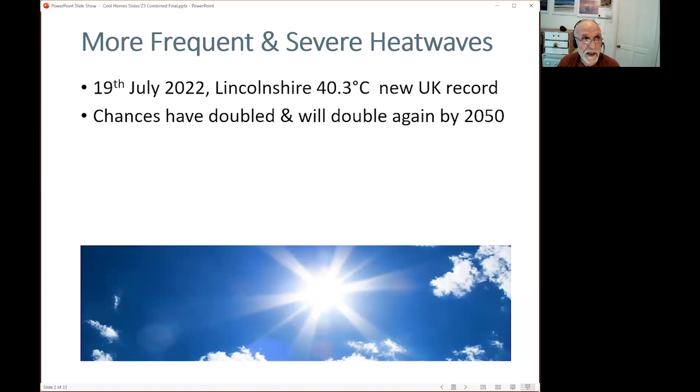Temperatures are going to carry on rising. And in fact, with El Nino, we expect that the next few summers will be even hotter than you might expect from global warming. I read recently that the chances of severe heat waves have doubled due to our carbon emissions, and it's expected they will at least double again by 2050. This is a bigger problem that's coming, or even so already - the Office of National Statistics estimate that there were 3,000 odd heatwave deaths in England and Wales in last year's heat waves.

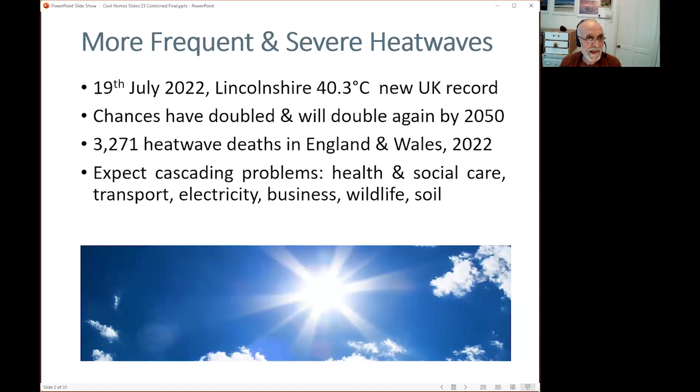So this is a serious problem for some people, and for many really uncomfortable. We have to expect - I'm giving you the full problem - but we expect there will be cascading problems in the severe heat waves to come. Health and social care services will struggle, so will transport, roads will be melting and railway tracks will be buckling. There may be quite severe disruption and, of course, effects on business and wildlife, the soil, natural environment.

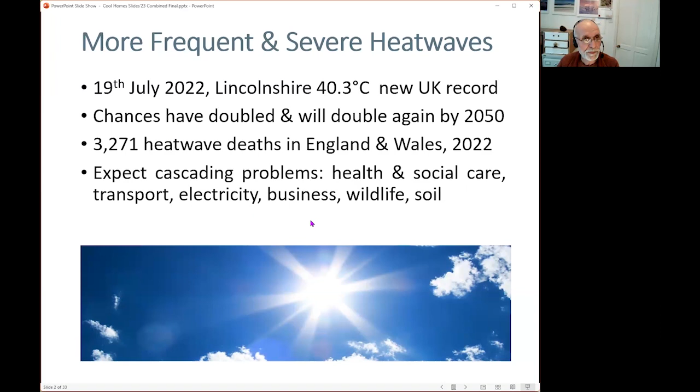Okay, so here's what we're going to do about it.

Hello, and nice to see everyone, and to be thinking about summertime finally. I have noticed that the sun, when it does get through this year, it is very hot indeed. Things have changed quite a lot in the last 3 years that we've given this talk.

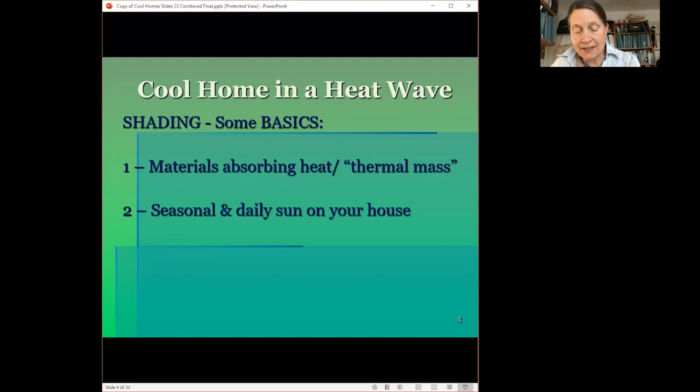We really have to be prepared, as Tom says, for 40-degree heat and over. So I'm going to look at two things, thermal mass and shading. I need to establish a couple of basics - these will help us when we're looking at different cooling strategies. We're looking at how materials absorb heat and what their thermal mass is, and also the seasons and the daily sun on your house.

Dense building materials - that's concrete, brick, and stone - absorb more heat and solar radiation, and then they release it slowly. This is what we call large thermal mass. In contrast, say metals, for example, conduct and release the heat really quickly. And of course, a substance like ice absorbs the heat and melts, but dense materials absorb and hold the heat.

Insulation foam and timber generally absorb less heat - they have smaller thermal mass. Glass, and that's even double and triple glazing, can absorb and transmit heat. It can allow heat inside in the summer, and it can leak heat outside in the winter.

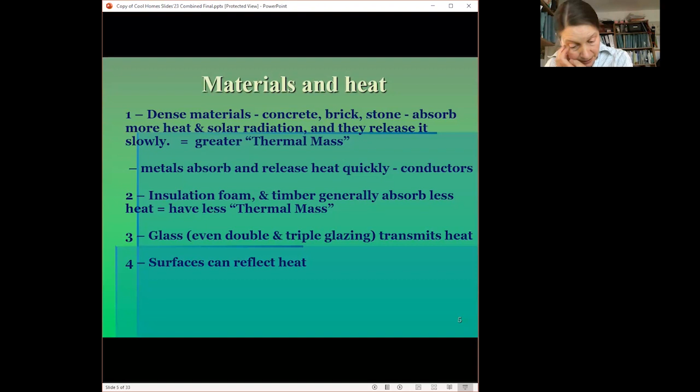And surfaces can reflect heat - Tom will talk about that a bit more later. But examples would be a light roofing material reflects more heat from coming into the building. And you can have solar film on glass to reflect the heat out or in.

So let's apply this to a house in the summer. Let's assume your house, or maybe a room in your house, is cool on the morning of a heat wave. How does that heat get into your house? Windows are a likely route in, but how? If the window is closed, the sun still shines through it, whether it's single, double, or triple.

When direct sunlight gets through the glazing, it will shine on and be absorbed by any surface it reaches. You can see that on the left - there are spots of sunlight on the chair, on the floor, on the table. These surfaces will radiate that heat back into the interior of your house long after the sun has moved around and the window is in the shade. And the window itself and its frame will also transmit heat back into the room.

So I've made myself some rules of staying cool. Rule number one is, in a heat wave, you want to block this direct sun - you don't want it to shine in the house and heat surfaces. So on the left photo, on the right-hand photo, the Venetian blinds are actually blocking those spots of sunlight from getting on the floor, on the table, on the chair.

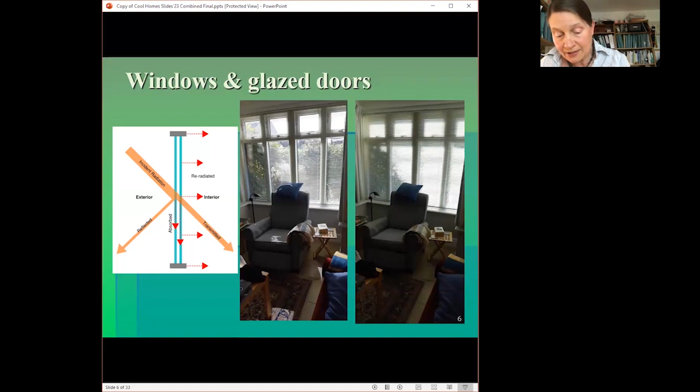Clearly, if you want to keep out direct sunlight during a heat wave, you need to get used to a shading routine morning and evening. If you also know the outdoor temperature, or at least whether it's cooler outside the window than in, then you can judge whether to open the window or not. We do not want to be accidentally sucking hotter air into the house in a heat wave. I'll speak later about ways of cooling the air outside your windows.

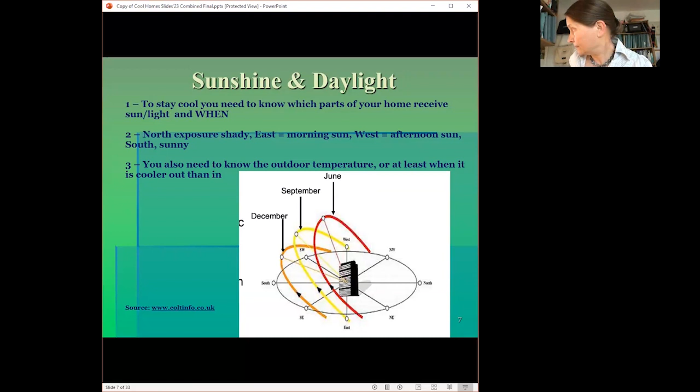The simplest way to shade is to put something like a roller blind or other fabric over the window. But these don't follow my rules. I want to be able to see the view out and to get some daylight in, but still keep the heat out. So an alternative is these Venetian blinds. As we've seen, they can be angled to allow a view out to some extent.

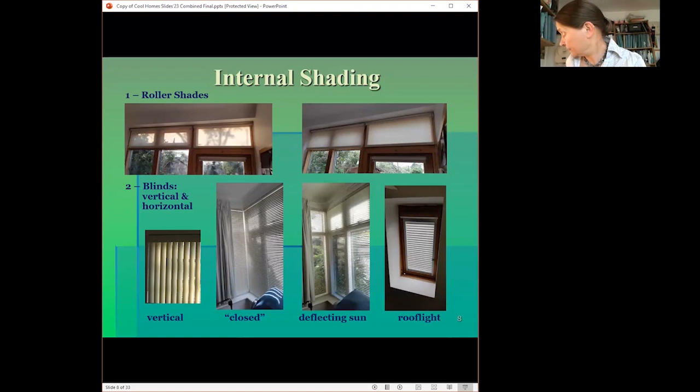Blinds have a fair number of moving parts to keep aligned and to keep clean. And the blind blades themselves heat up in the sunshine, so they will actually transmit heat into the room.

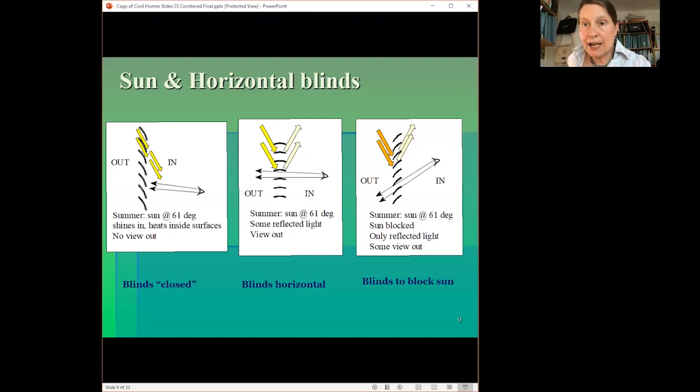So let's look now at another kind of shading: external shading. The great advantage here is that the sun is blocked before it can heat up anything inside or the windows themselves. With internal blinds, as I said, the window heats up and the blinds themselves get hot, and both of these will warm the room. External blinds avoid this.

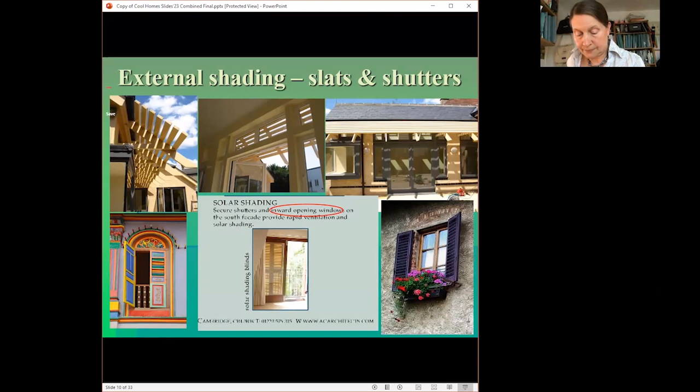Direct sun can also be screened by suspending fabric outside the window. Heat blocking mesh has been readily available for roof windows for some years. If you have old roof windows, you can add these, and there are people locally who will do that. If you're interested, put a note in the chat.

Maintenance under the wear of wind loading, rain, and grime presents significantly greater problems with external blinds compared to internal ones. These particular fabric awnings are stored in a metal cassette at the top of the roof window, rolled up. They are extended into place at the beginning of the hot summer weather, and then you leave them there until the autumn. This way, they stay cleaner all winter and are subject to less wear and tear. As part of the roof light package, they're quite reasonably priced.

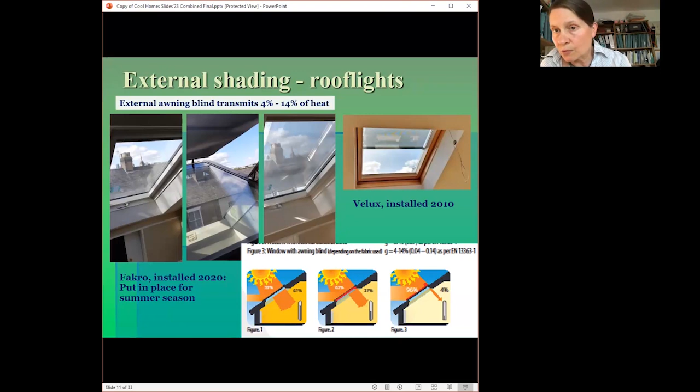It has so far not proved easy to obtain awnings for windows in this heat blocking material in this country, even though they're readily available for roof lights. Some of my clients will be making rectangles of this micromesh fabric, bought as a roll of fabric. With eyelets, they will be hooking these to the outside of their window frames in the summertime. But so far, to my knowledge, such simple awnings are not available commercially, at least not at affordable prices. In fact, for that project, we had a quote of £1,800 per window.

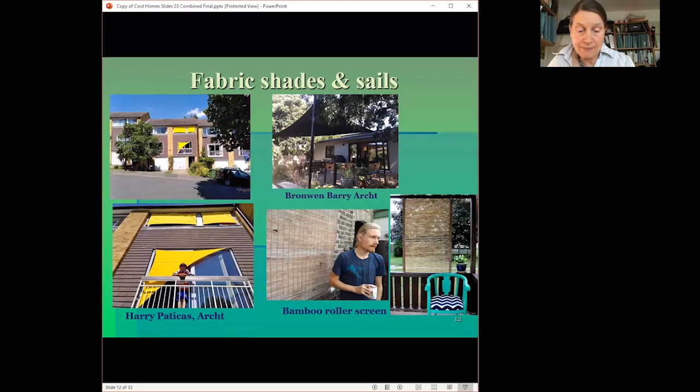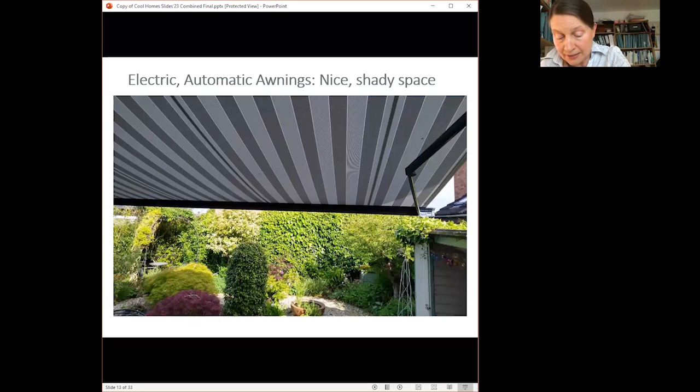Now we come to the video. Do we want to show this, Tom? I think we're short of time, Margaret. Okay, we'll skip it then. And then we can come back to it if people want. Sure, it's a lovely video if you can see it sometime. Oh, there she is, wait a minute.

So in summary, you need to know where and when the sun comes into your house. In a heat wave, you can make a big difference if you evolve a daily routine for blocking direct sun. Tom will talk about ventilation, but opening and closing the windows is also part of that routine. Many forms of internal shading are available and flexible, but they do allow in a fair amount of heat. External shading keeps the heat out more efficiently. It can be fixed or adjustable, but it has to be tough enough to cope with wind, rain, and grime, which inevitably means it will be more expensive. But of course, the total effect can be very satisfactory.

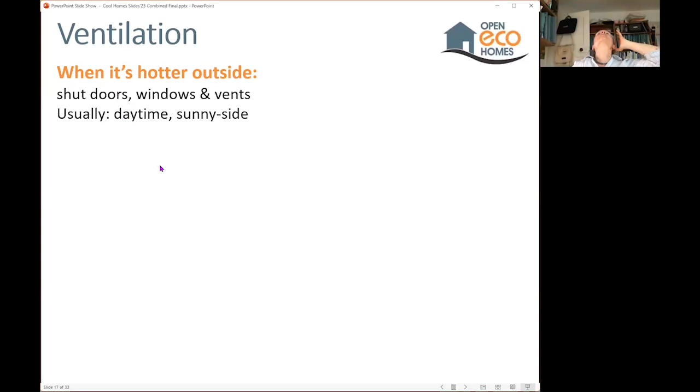So when it's cooler outside, usually at night, that's the opportunity to really get your house cooled down. If you're in a multi-story house, it's great if you can open a window or vent at the bottom of your house and at the top. Then you'll tend to get the chimney effect that will flush cold air from the bottom, and the hot air will escape at the top.

Or maybe you don't have two stories where you live, so if it's single story, maybe there's a way you can arrange to open windows on either side of your house, particularly if there's a breeze that will flush the hot air out of your house. Or maybe you need to make use of a fan as well. Fans are low consumption in terms of electric consumption, especially compared to aircon, so do use fans if you need to get effective ventilation.

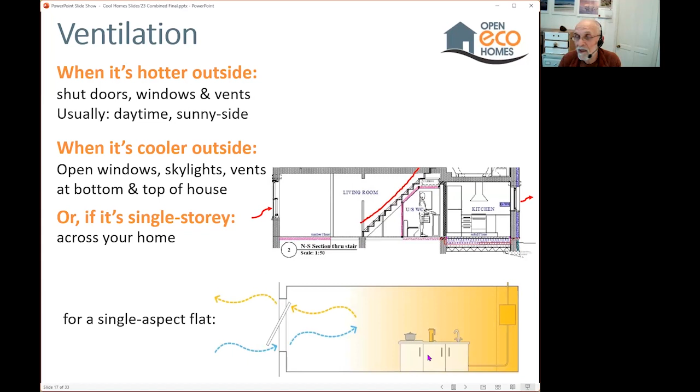My heart goes out really to people who are in single aspect flats. There's still plenty of new build flats facing south, with no shading on the windows, so you can't get a through draft through them. We went round one recently where the only way they could get a through draft would be to open the door onto the stairwell, which wasn't a secure thing to do at night. In fact, that particular house had hot water pipes due to solar thermal on this block of flats.

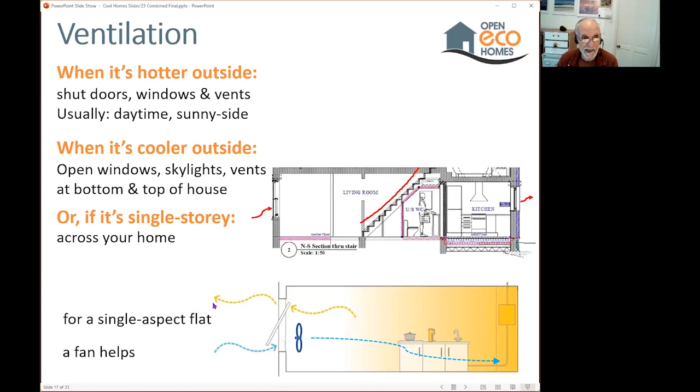Hot water pipes were heating up the back of the flat. She did get those better insulated, but it's a slight improvement. If you've got a window that will open at the top and the bottom, then you'll get some circulation like this. And if you could have a fan here, that would help blow the cool air to the back, and the warm air will get out the top. But all sympathies for people who are stuck in a very sunny, hard to ventilate flat.

So we talked about the security of being able to open windows at night. Here are some regular kinds of window openings, and most of them can have secure fittings. These will prevent the window being widely opened, so nobody can come in or out, but you are definitely letting the air in. Look for a general category called secured by design - that's a good place to look for windows and doors that are secure.

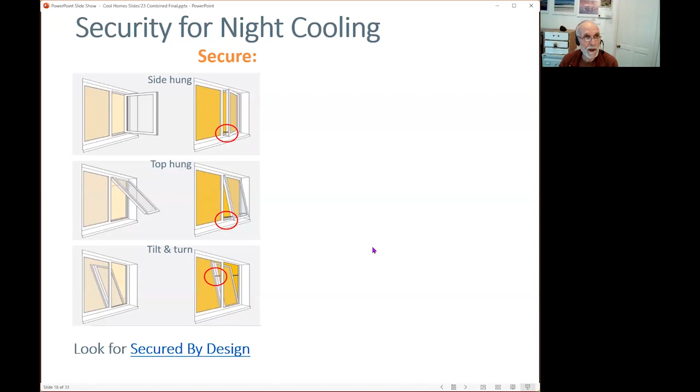And of course, you may have sash windows that slide up and down. There are systems - here's one called Ventlock, which can be used to partly open a sash window, but it prevents anyone from outside opening it further.

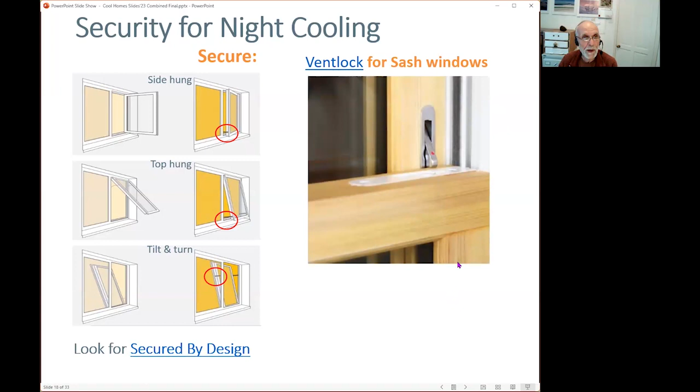Okay, now a little bit about insulation. So here is a slate roof at over 74 degrees in a heat wave. It's quite likely that you may well have a really hot roof on the surface. So plainly, you don't want that heat to get radiated down into your home.

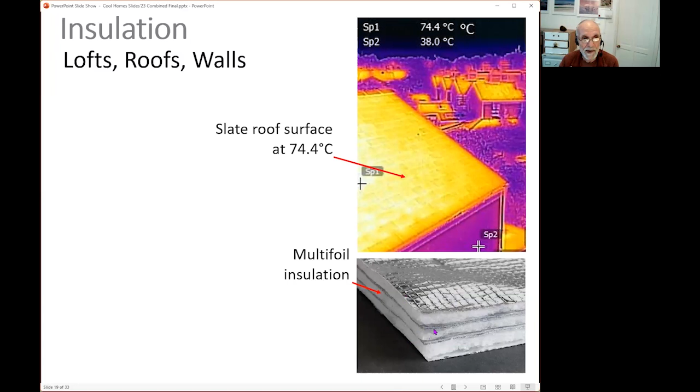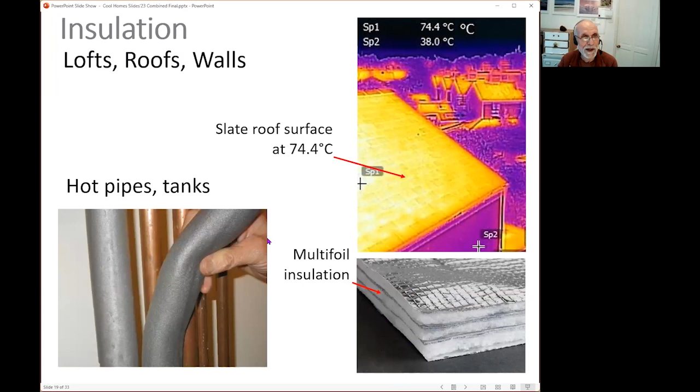If you've got good loft insulation or good insulation under the roof, that will help, because it's radiant heat coming down, not really a problem with convection. This multi-foil insulation may be particularly effective - it has 4 layers of shiny surface. And of course, insulation is important too on your hot pipes. Even in the summer, you probably want hot water, so make sure those pipes are well insulated.

And now a little bit more about thermal mass. As Margaret said, brick, stone, concrete - these heavy things can work to steady your indoor temperatures. Here's an example looking at solid wall insulation. First of all, if you've got the insulation on the outside, that's useful from this point of view, because all these tons of bricks have got lots of thermal mass on the inside of the insulation. If you've got a solid floor, that will also be thermal mass, and it may be good to have a tiled floor to let the cool underfloor keep you cool. So in general, that will have a steady temperature.

In contrast, if you've got internal insulation, then it's going to be great for quickly changing temperatures. Having a carpet may insulate your solid floor a bit, but in general, this would be quicker changing. And in the winter, that may be an advantage if you're coming home after work and want your rooms to heat up quickly - this kind of low thermal mass solution will help it warm up quickly.

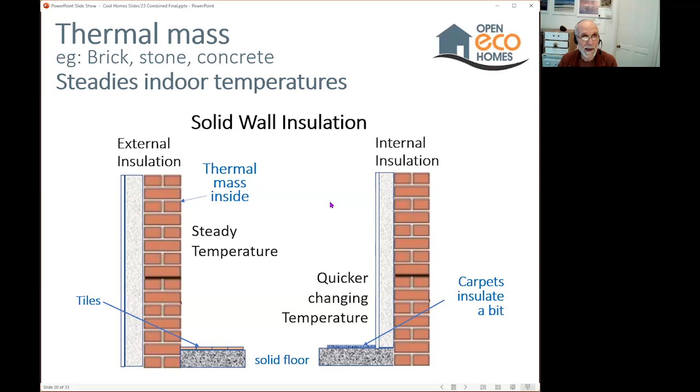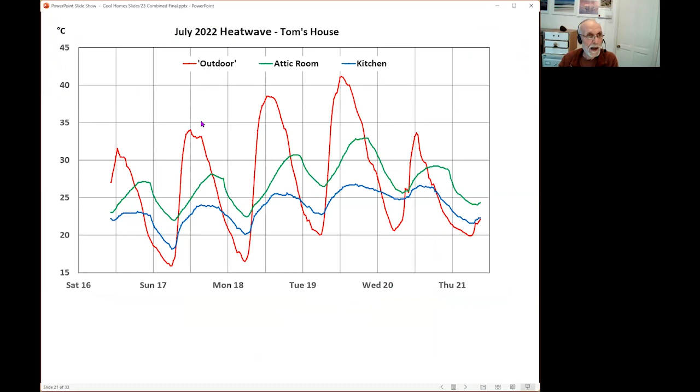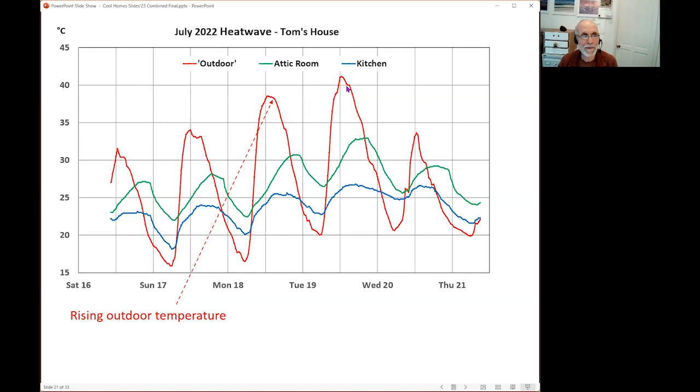So this is some temperature readings for my house in July last year in a heat wave. The red line is my measurement of the outdoor temperature. Day on day, these 3 days of this heat wave, the maximum temperatures went up every day, and also the nighttime temperatures were rising. This day, the 19th of July, was the day there was the record 40-degree temperature. My temperature sensor seemed to be saying a bit more than that, but I'm not claiming the record - I think I've got a sensor that isn't weather station quality.

But have a look - we have an attic that hasn't got a lot of thermal mass. It's got stud walls, and of course it's right under the roof, and so that was going up to 33 degrees on this worst day, quite uncomfortable. Whereas the blue line is our kitchen, which is downstairs, with good thermal mass, and without any aircon or anything, it didn't get hotter than 27 degrees, which I find really comfortable still.

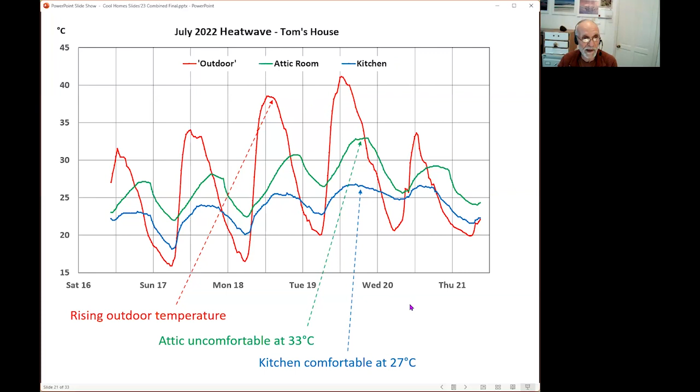So this is what you can do, but I would point out as well, the heat wave broke off after the 19th of July, and it got colder again. If this heat wave had carried on for a week, our temperatures would probably have continued to rise slowly. So the longer it goes on, it can be more of a problem.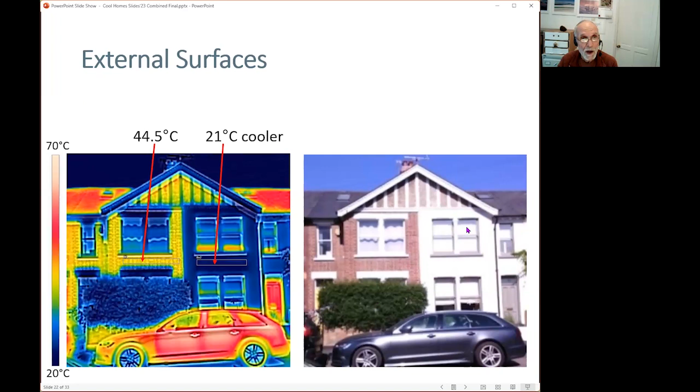You can also see here that these houses had really hot roofs, some up in the 60s. And this one on the right had quite a hot door - it's got a grey coloured door that wouldn't have been as hot if it was white. You can see they're using white blinds inside, which is a good idea.

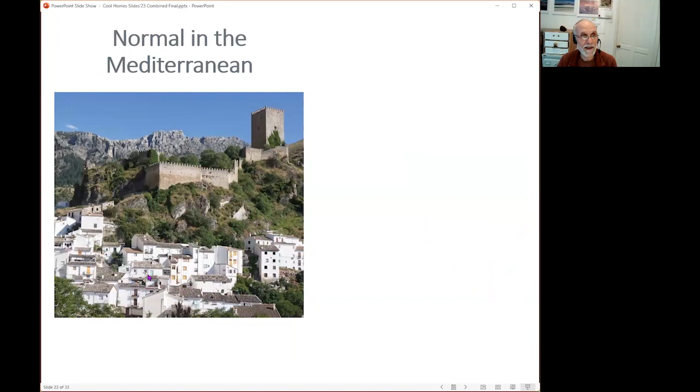And of course, in the Mediterranean, white painted buildings are completely normal - they know it keeps the sun out. This is a Cambridge house, but there aren't many like this: white painted, with external shutters.

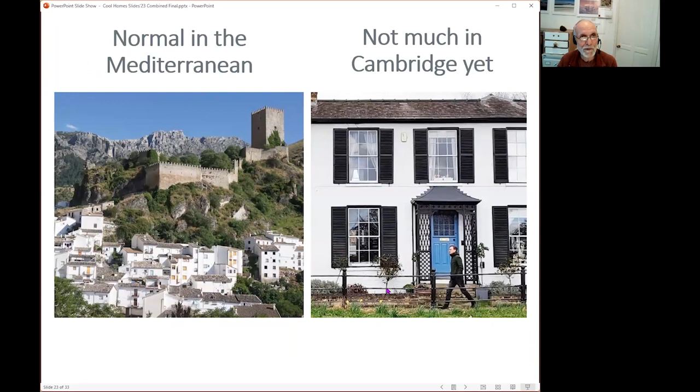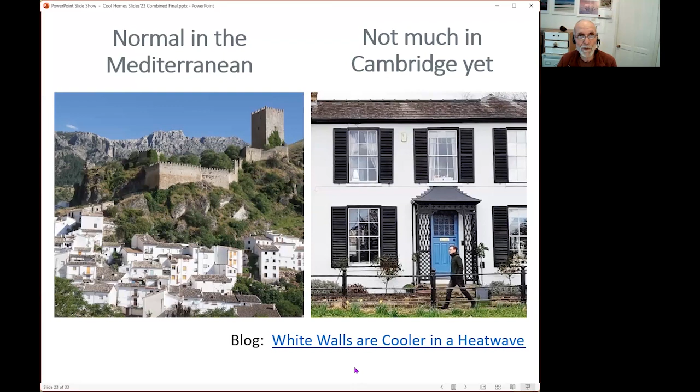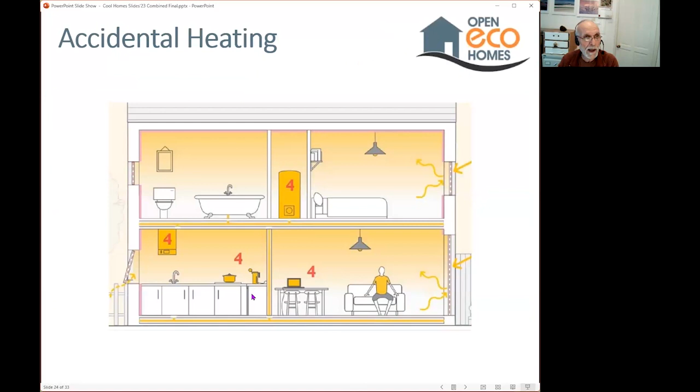So one more topic about accidental heating - these are ways you may need to think about controlling what makes your room hotter indoors. If you've got your boiler mounted indoors, that will be hotter than you want probably - maybe it can be put in a cupboard.

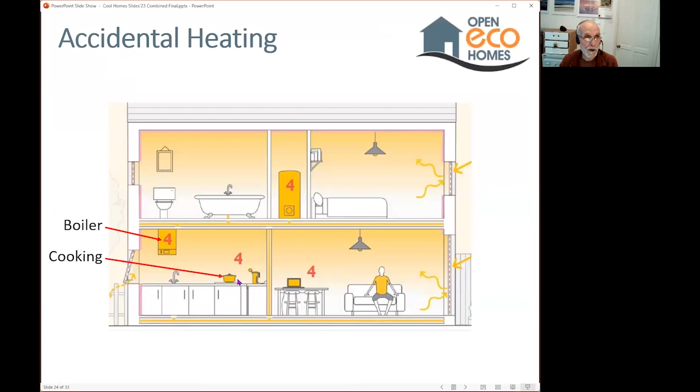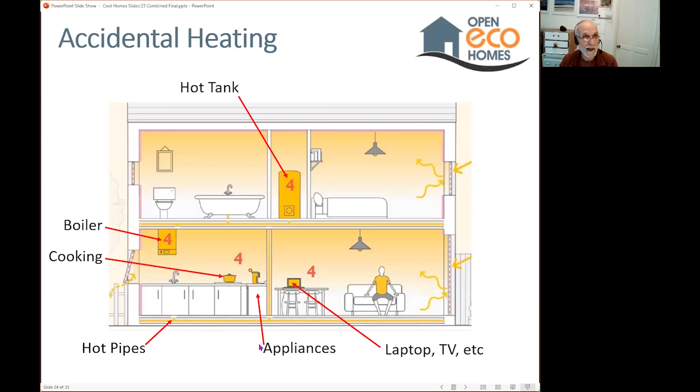Cooking itself will put heat in the house, as will a hot water tank and hot pipes, and your appliances - laptop, TV, washing machine etc. All things that might be contributing to heating indoors, so maybe you can minimize that in a heat wave. Or longer term, when you replace your appliances, choose efficient ones, because they'll heat your home up less.

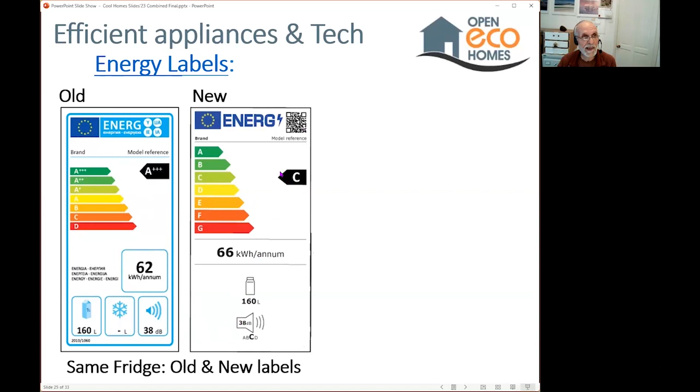With incidental heating, you're probably used to these energy labels - they've changed recently. Here are two labels for the same fridge: it used to be rated A+++, but because they were running out of categories, here is the new system of energy labeling. This one is now a C. You can recognize the new labels because they have a QR code on them.

And of course, switch appliances off when they're not in use - you probably don't want to do that with your fridge though. This is a good website, Sust-it, which rates thousands of appliances and technical gear for their energy efficiency.

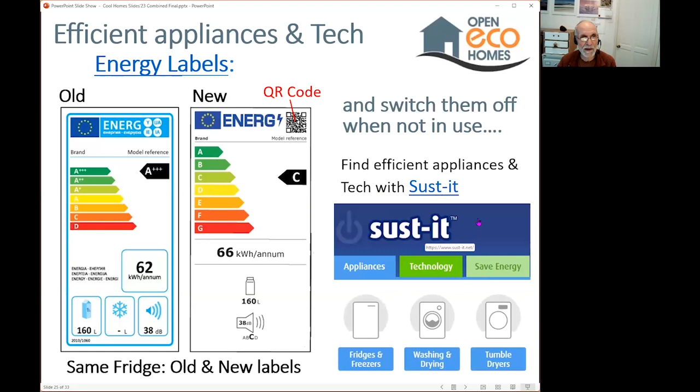So finally, personal cooling: obviously your drinks, cool showers, fans, sprays, the way you wear your clothes, particularly when you go outdoors, will all help. Maybe you can put a hot water bottle in your freezer, not fully filled with water, otherwise the expansion may be a problem, and then take it to bed with you.

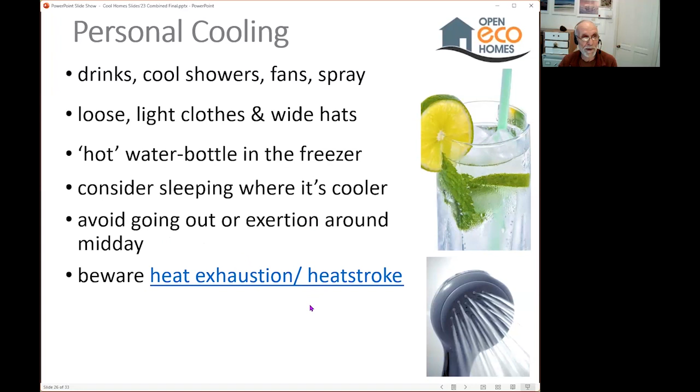Maybe consider sleeping somewhere cooler - if your bedroom is really hot, is there somewhere else, maybe on the ground floor or the north side, where it would be cooler and more comfortable. Don't go rushing around exerting yourself outdoors if possible - heat stroke and heat exhaustion can be a real problem. There are good NHS resources on that, which this links to.

So finally, can I suggest you also look out for your neighbours. Maybe you're doing well fixing these problems and have a comfortable home, but there's somebody old, young, or vulnerable who you could invite to cool off in your house - there's more NHS advice there, maybe you can share some of these with them.

Oh okay, so I won't go on to that yet, Margaret. But oh yes, no, maybe we are going to this, Margaret, aren't we now? Yeah, okay, I'm going to stop sharing. Yeah right, so there's no poll or chat. Okay, no, so my screen again is... so there, it's just me doing it instead of Tom. Is that okay? Good, yeah.

Okay, so I just wanted to say a few words about the role of the ground outside our windows and the role it can play in keeping the room cool. If we're lucky, this is a garden that we own, but it may also be that we can influence what is planted on communal grounds.

So the way we get cooling usually comes from evaporating water - as the water dries out, it absorbs heat. We can use this to make a garden cool. Gardens tend to be cooler because the leaves transpire, as in the pictures here - this means they release water in the form of vapor through the leaves, and this water vapor evaporates. As it evaporates, it cools the air, just like air conditioning really. So you probably notice going outdoors it's cooler, and some areas are significantly cooler. Evaporation from transpiration can make natural air conditioning.

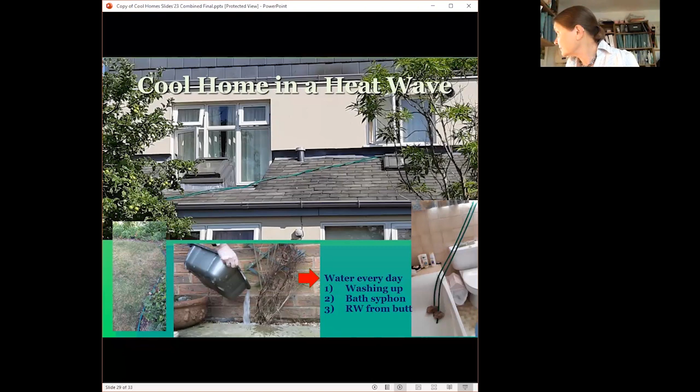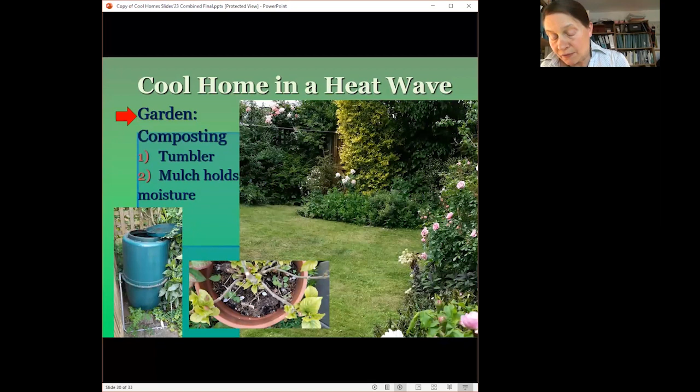And of course, there are also plenty of insects for them to eat. If you could set up a bird bath, then they can bathe in that, and it helps them cool off as well. So that's my little offering on the garden.

I've seen there's a comment a bit further up about roof lights. Oh yes, the issue of having rather large, more difficult to cover curved roof lights, and the issue that if you cover them, then there's no light. So it wasn't a question, it was a comment. I wonder if we could think about that.

Let's just see, where is it. That sounds really hard, I don't quite understand, Sarah. Which direction is this roof light curved? Is it bulging outwards towards the sky?

I think this is from Catherine. Oh, Catherine, sorry - large roof lights in the sitting room. The neighbor put a tarpaulin over there, so this gets rid of all the light. They are curved and approximately 2 meters by 1.5 inside.

You might just try the people who provide external light-reducing mesh, like what they call awning blinds for roof lights, and ask them if there is any product that would work with a domed roof light on a flat roof. I think you may be stuck with an internal blind there.

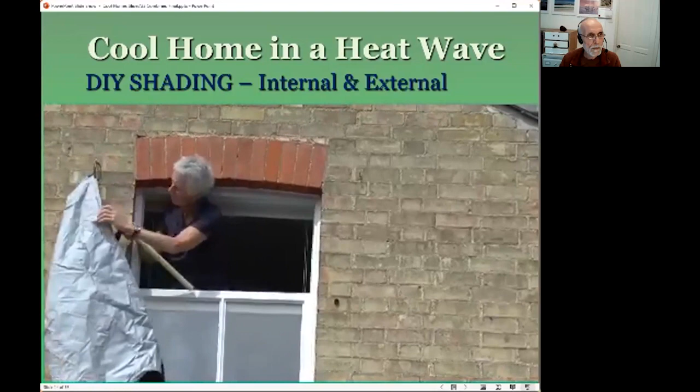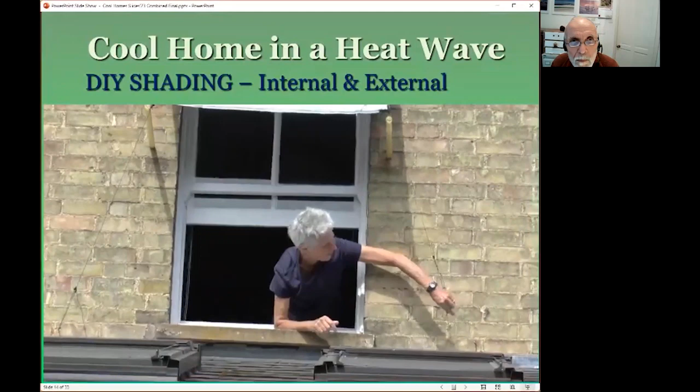A DIY awning, featuring my wife Anne. My office faces south, so when it's forecast to be hot, I like to put up an awning that I made in 2010 to shade the window. I lean out and hook some elastic loops at the top over hooks on the wall. Then two lengths of tube hold it out the bottom edge. I tension it all up with guy ropes attached to more hooks screwed into the outside wall at the bottom. It works very well, and the shade keeps the room cool.

We have a larger awning downstairs, and this one is held out with guys to the garden fence.